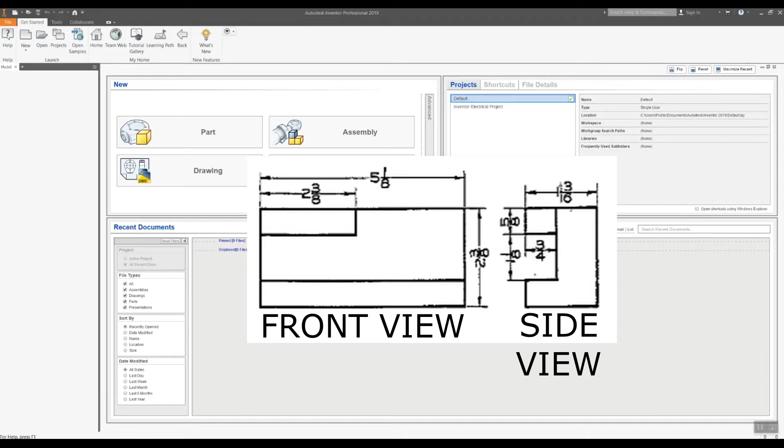Hey kids, we're going to get into our first real drafting project today. As you can see, I'm only giving you two views for this object, a front and a right side view. From there, we have to work out what our final view is going to look like.

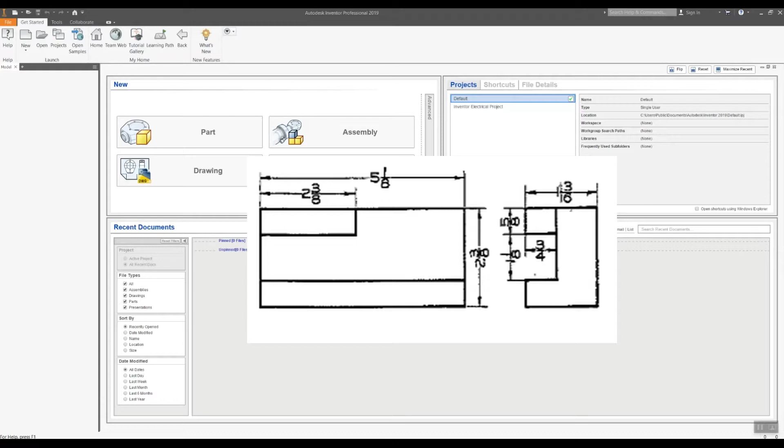My idea is, if you look at the side view, it's going to look like a channel, almost like a C, but backwards. But looking at the front, I've got this little part taken out. So I think the C on top isn't going to go all the way down, only halfway. If I sketch it out right here, I think if we lay out the front and the right side view, I'm going to get an object that roughly looks like what I have in front of me. Let's see if that actually works.

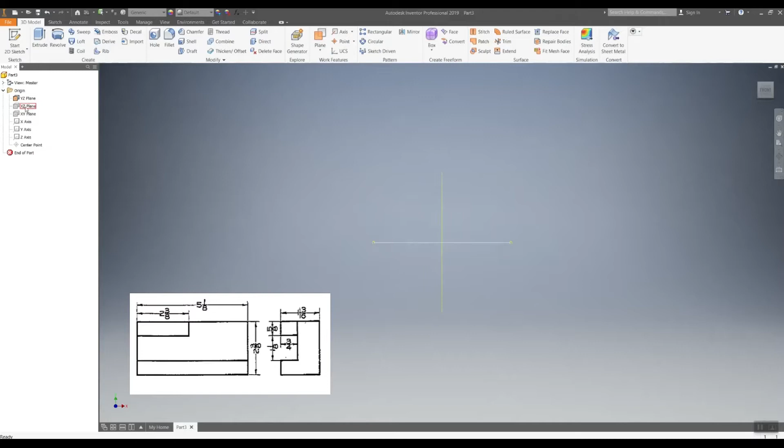How are we going to do it? Well, as always, we're going to go up to New, and start a new standard part. We're going to work in English standard part and hit Create. This brings up our model space. I like to go over to the model tree, bring down origin, and turn my visibility on all of my planes. That just helps me see the object a little better.

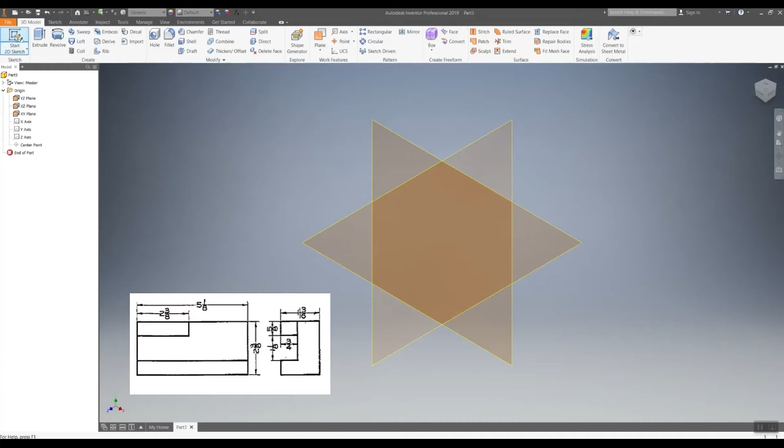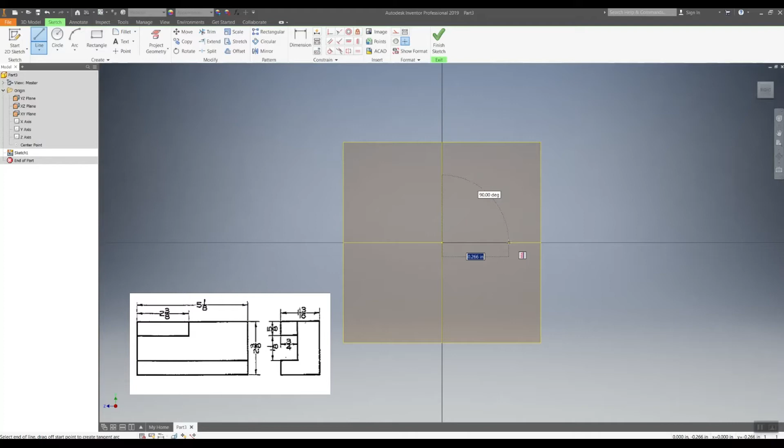Now what I'm going to do is draw this backwards looking little C. I'm going to start at my origin, come down here. I'm going to go over 1 13/16 -- 13/16 in decimal form is 0.8125. I'm going to go over then to 1.8125. I'm going to go up the height, which is going to be 2 3/8 or 2.375.

I'm going to go over to the end of this object here. These little guides are 5/8 inch deep, so I'm going to go over 0.625 down. The drawing says it is 3/4 or 0.75 deep. The length of it is 1.125.

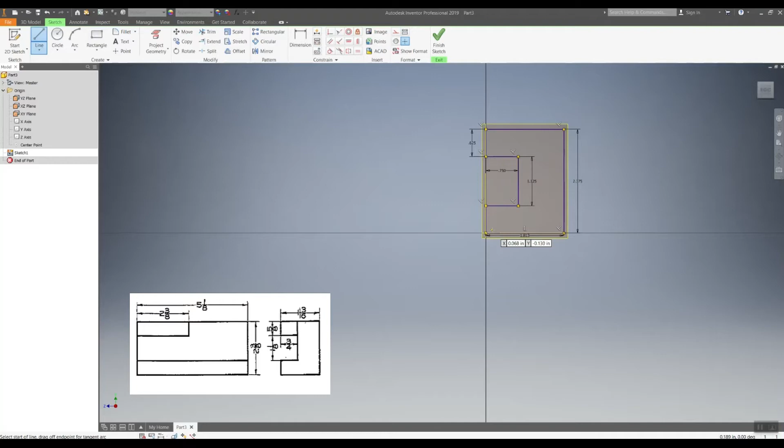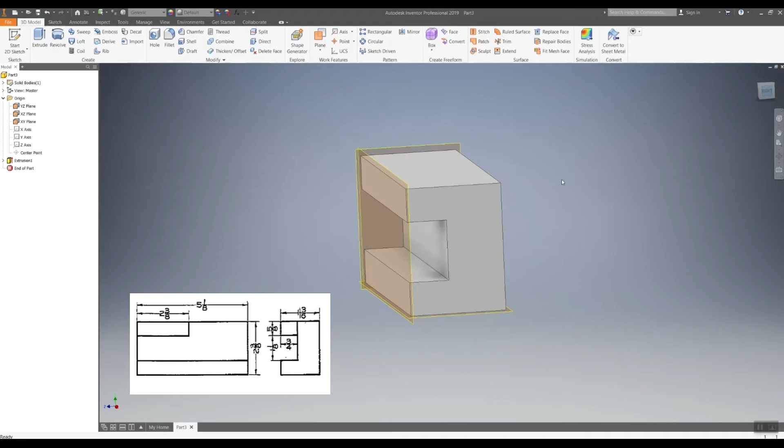Then we can simply just use our dotted lines to line stuff up. I have all little yellow dots, so I'm good. Everything is closed, that makes me happy. At this point, we can finish our sketch. I want to extrude this out, so I'm going to my extrude button. This is a very long object at 5.125 or 5 1/8 right there.

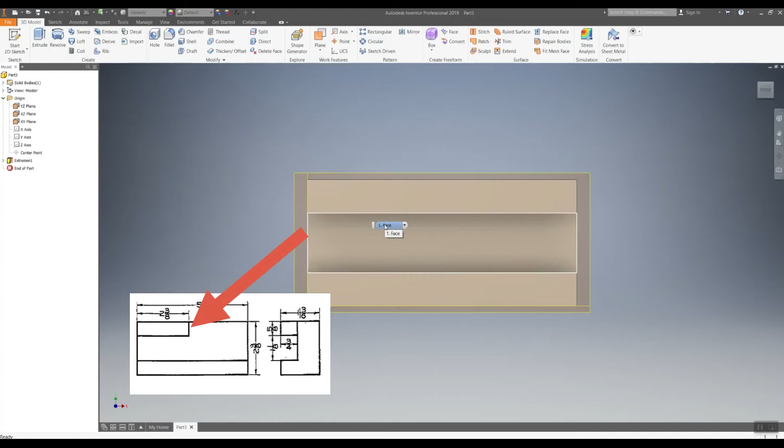So far, that looks like what I was thinking in my sketch. My front and side views look similar, but here you'll notice I have a little part taken out of. Now, this is either a part that's there or not. Let's take a minute and look at this drawing. If you look, the object right here looks like it is actually part of the object and stops where it's not here anymore. So I think this part of the object isn't going to have anything.

Let's go ahead and make a sketch on this part of the object, or this plane. I'm going to go to Start 2D Sketch and click right there. What I want to do is draw a box. Now 2 3/8 is how much there is. So if I take 5.125 and subtract 2.375, I get 2.75. That means if I go to this end over here, I can just simply type in 2.75.

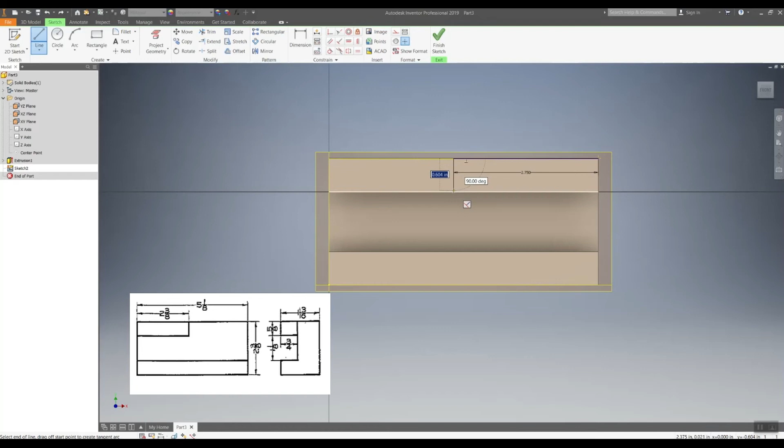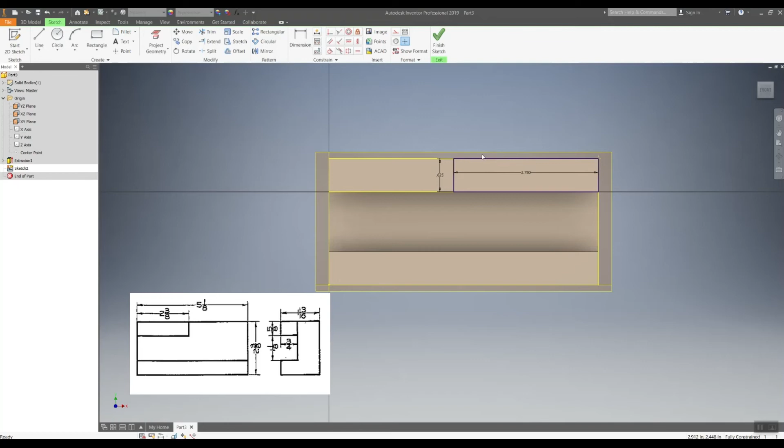I'm going to go down the width, which is 0.625. Then I'm simply going to complete my box, close my object. To get out of it, here's another little handy trick: you can right click and just hit OK instead of going up and hitting the escape bar. This is what I'm going to extrude back, because I think this is missing from the objects. Let me finish the sketch and let's test this out.

Let's extrude. Now we want to go the other direction, and we only want to go the depth, which is 0.625. If I hit OK, that looks pretty similar to the sketch I started with. There's that line, except it looks like I need to go a little further back.

So it looks like I made a mistake. Oh, I did make a mistake -- I went back 5/8 and it's actually 3/4. It is a good opportunity to learn how to fix our mistakes. So this object is still here. Would it be really helpful if we could just edit that mistake I did? Well, we can. If we go over to our model tree, we can find extrusion 2, and if we simply run over it, it'll highlight what that feature is.

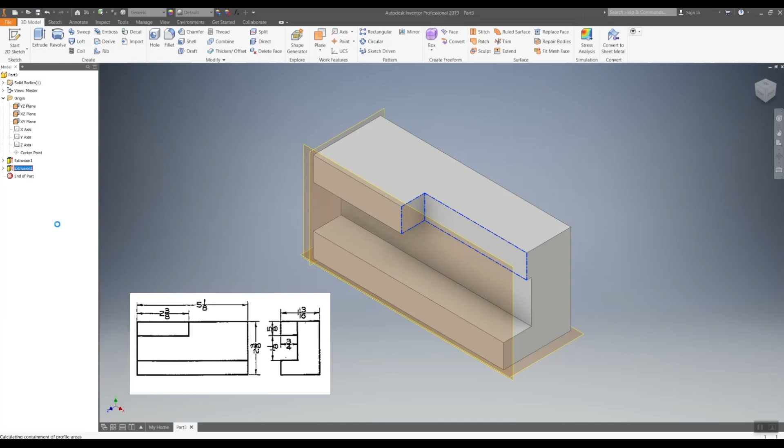This is that part. If I right click on it, this is a feature, so if I hit edit feature, it'll bring this box back up. The real depth was 0.75. 5/8 was how high it was. So now I hit OK.

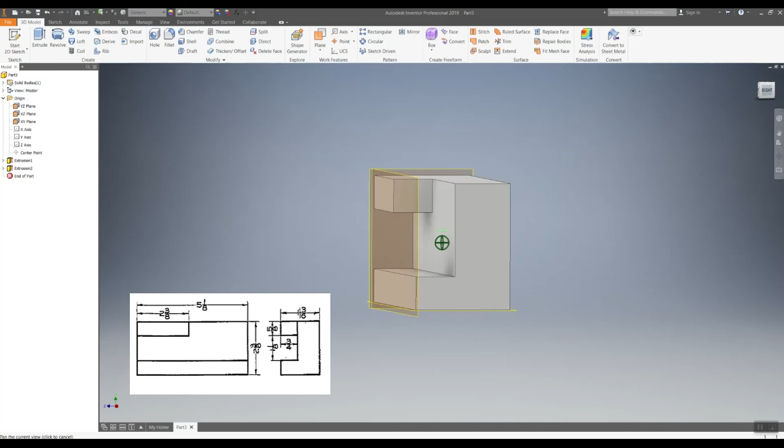Now if I look at my right side, that looks exactly like my drawing. The front part, that looks exactly like the front part. So this looks pretty close to the sketch that I had originally. That's how we use different views to build an object.